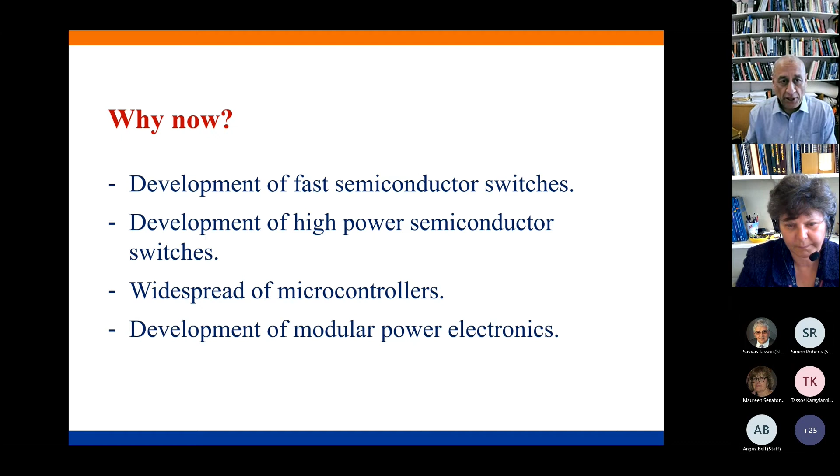Perhaps over the last few years there are what we call wide band gap semiconductors. They are available at very high voltage and can withstand very, very high temperatures. This is a major breakthrough within power electronics devices.

Another thing we have is the IGBT, insulated gate bipolar transistor. This is a big breakthrough. It has been around for more than 15 years. The voltage and current level we're talking about is up to 1200 amps and 4.5 kilovolts.

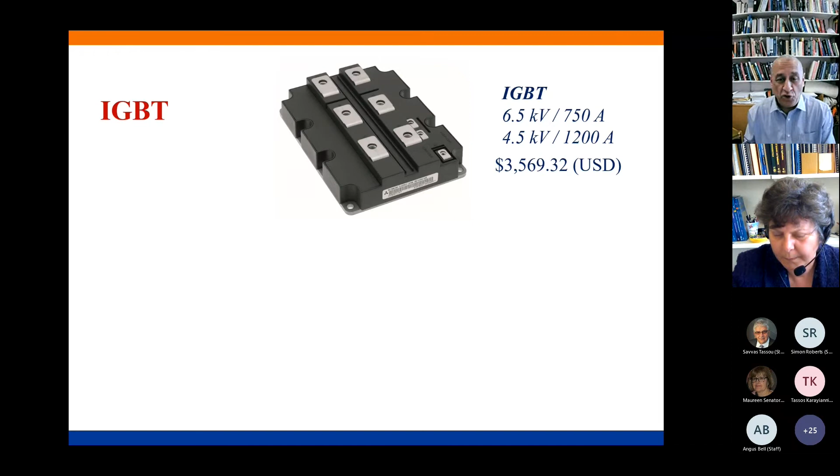Until 2 years ago the prices were very, very high. The price is still high, but suddenly over the last year, for those doing practical work in universities, a new IGBT came out on the market that can withstand 1200 volts and carry 75 amps—very high voltage, very high current—at a price of less than $5 compared to $3,500. So prices came down, especially for practical work, and a lot of my students are already using these sorts of IGBTs.

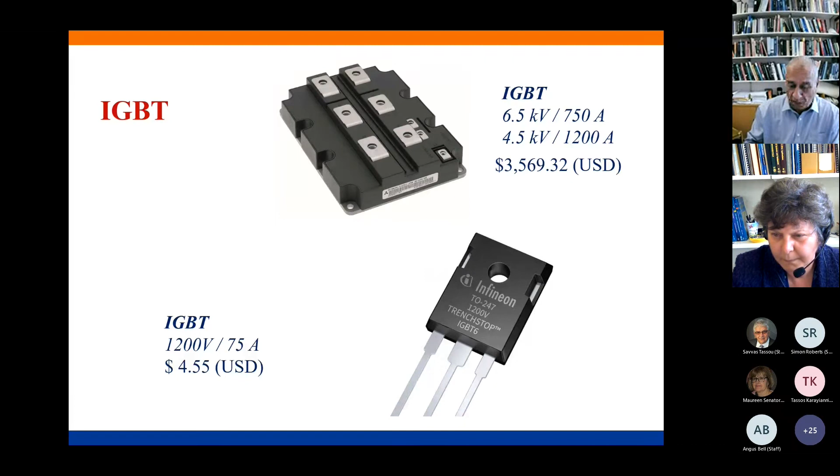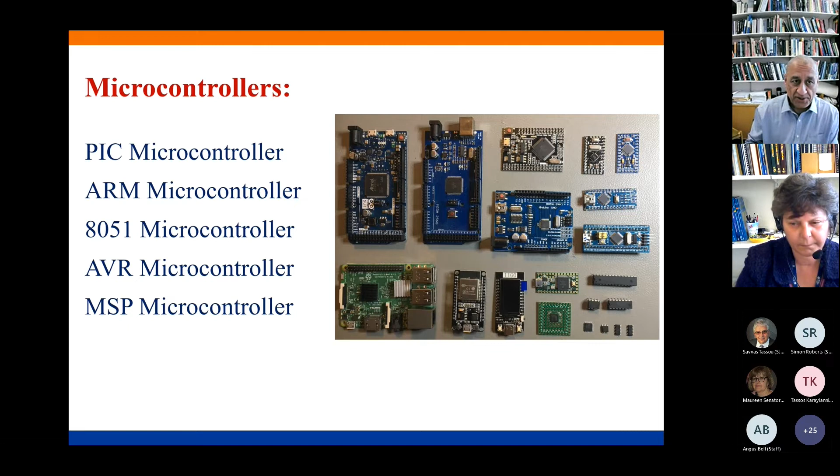For microcontrollers, there are so many varieties—the PIC, the ARM, the 8051—there are so many of them, and the prices became very, very cheap while they are very powerful and very fast. That enabled power electronics to do a lot of things which were very difficult to do in the past.

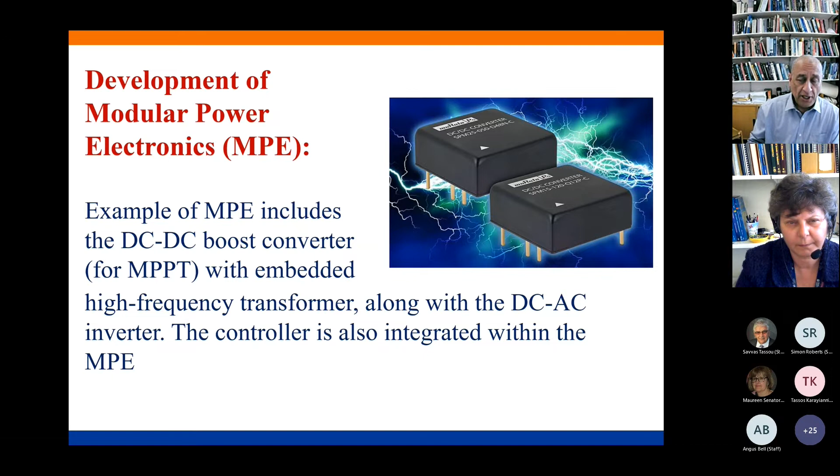I did mention modular power electronics. Nowadays you can find it all integrated in one—for example, maximum power point tracking within the inverter, within the DC to DC converter, all with the protection circuit, all encapsulated or integrated together in one part. So discrete components, although we still use them for students in the lab, from the manufacturing point of view, they are working within modular power electronic systems.

Okay, there are two challenges specific for power electronics. The first one is the inverter itself. Inverter, within electronic engineering, means conversion from DC to AC. Sometimes people with a mechanical engineering background call it a converter, which is from AC to another AC, while they have a DC link in between. Definitely the inverter is at the heart of any power electronic device nowadays.

Electromagnetic compatibility, filters, power quality - all of these are challenges within power electronics. Power electronics is sort of challenging itself: it creates problems and then tries to solve these sort of problems.

Within the inverter, when we talk about solar or renewable energy, there are so many different applications. For example, we can have a centralized inverter where all the PV panels are connected together via string diodes, and then we have a central inverter. Of course, this has some advantages and some limitations.

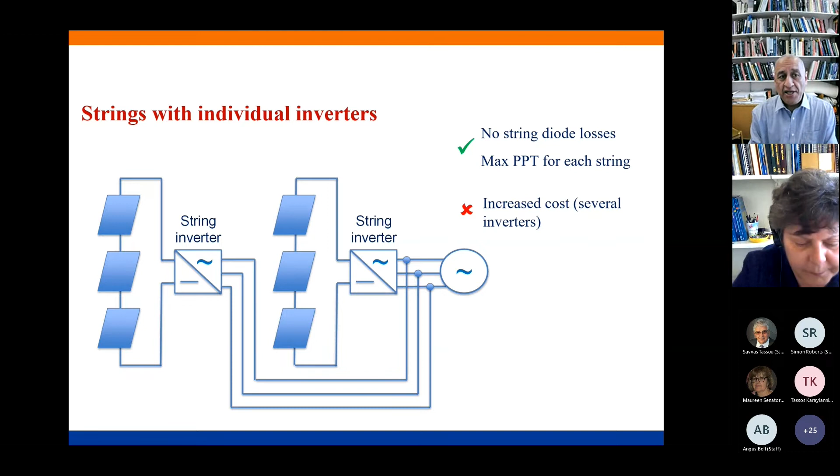We can also have what we call the string inverter, where the maximum power point tracking and the conversion from DC to AC is carried out per string. Again, this has some advantages and some limitations.

Then we have what we call the common inverter, where the maximum power point tracking is carried out per string, and then we have a common inverter connected to the utility. Again, this has some advantages and some limitations.

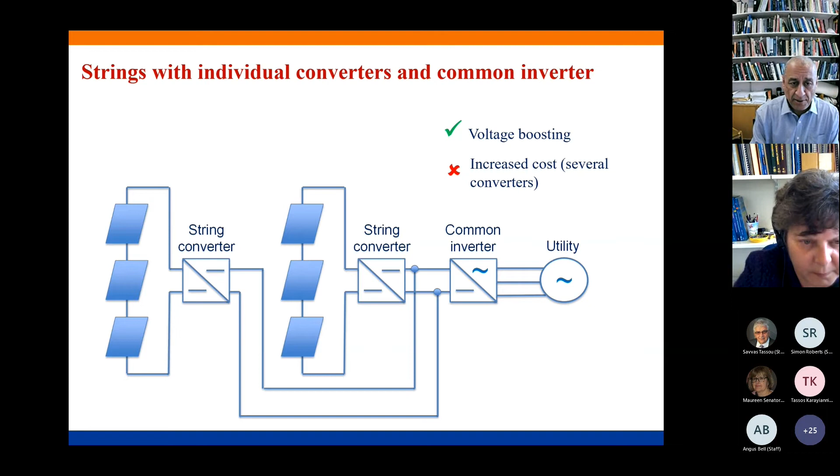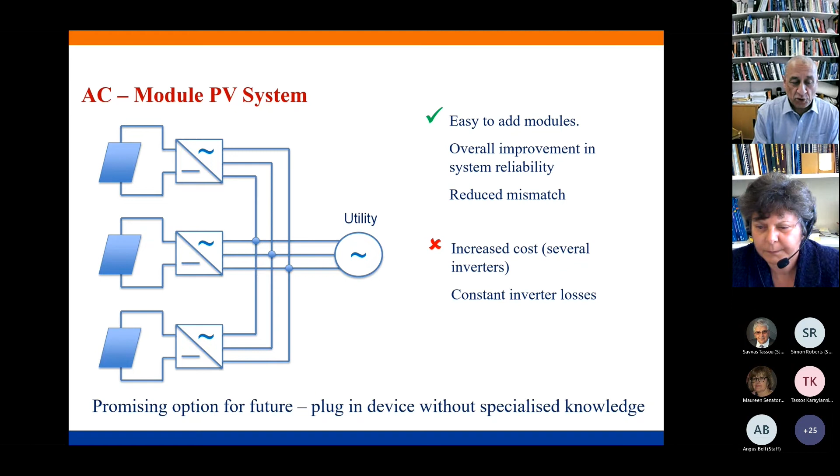And then, of course, we have the state of the art, which we call the AC module PV system, or microinverter. That means for each panel, the inverter is already built into the back of the panel, and they are all connected together and connected to the utility. This is very popular nowadays. However, the controller has to be challenging because proper synchronization has to be carried out. This is the promising option for the future.

These are key measures for inverter circuits, something like distortion - we call it total harmonic distortion - the losses, the complexity, the filter, the cost of the system, how it's controlled, and what sort of frequencies it's operating at. All of these are challenges when we deal with power electronics.

So inverter looks very simple, but year after year, I supervise a lot of students doing work on each of these bits of the inverter.

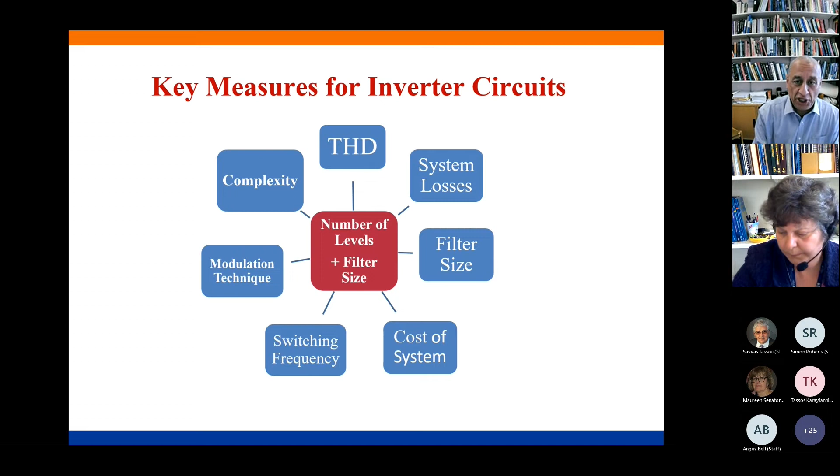Also, the second thing is electromagnetic compatibility, filters, and power quality. Power electronics in general generate a lot of problems like power quality issues, electromagnetic interference, and so on.

However, power electronics can also clean up the mess it generates. So what we have in front of us here is how we deal with identifying the problem, then identifying a range of solutions, then evaluating the solutions to find the optimum one. In a way, we create our mess, but we clean our mess as well. This is the challenge within power electronics.

An example of that is the active filter. When we talk about filters, something like nonlinear loads - let's say a computer is a nonlinear load - it generates a lot of unwanted frequencies, which we call harmonics. We use power electronics to clean up these harmonics using active filters. So what we do is inject harmonics opposite and equal to the ones generated from the nonlinear load, and that gives us only the fundamental component at the supply.

So this is one of the powerful active filter performances within power electronics. That's what I talked about regarding power electronics challenges. And then we have general challenges.

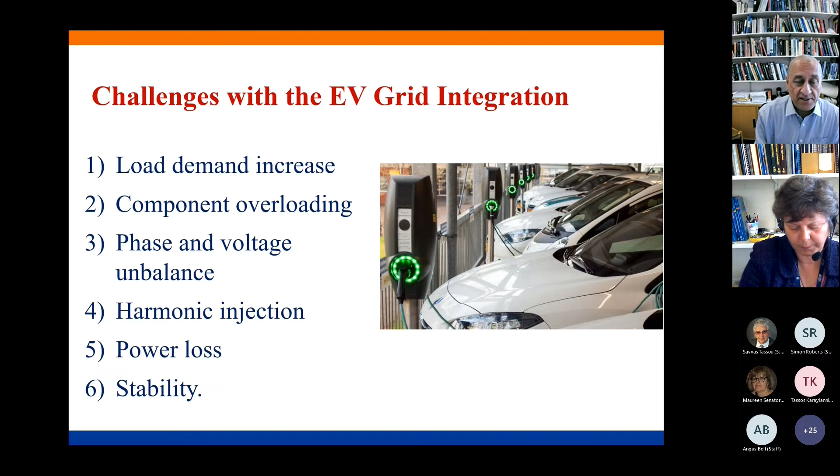First of all, a load demand increase. Suddenly we have a big load demand there. And then component overloading, phase and voltage imbalance, harmonic injection - all of these inject harmonics, power loss, stability issues. People working within the power system will understand each one of these is a big challenge they have to be aware of.

Now, of course, are we catching up? Can we do something? There are two scenarios you have to be aware of. The first scenario, car park within EV charging facilities - are we ready for something like that? And if we have home installed EV chargers, are we ready for that? So what I'm doing here, I'm taking these two scenarios - that's where we're going to charge our cars.

If I take the first one, EV charging facilities - here we go, you take your car, you go shopping and you charge it. Now, of course, we talk about the times of the shopping, it is limited within 5-6 hours. What do we need? If everyone is charging their cars, especially those who don't have a charger at home, now we're having a problem there.

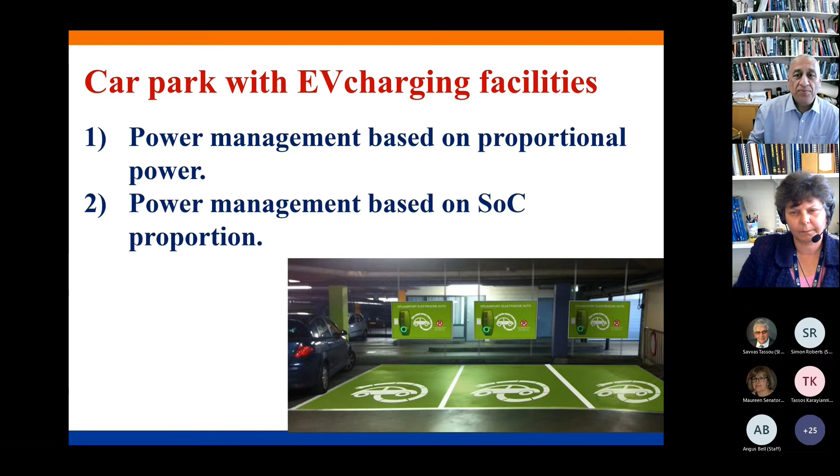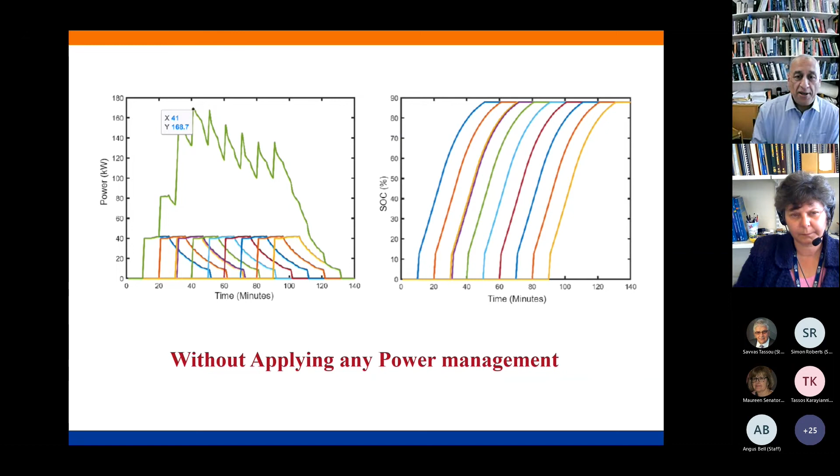So we must have a proper power management based on the proportional power there. Now, also we have to look at the state of charge of the proportion there. There is a study which shows if we don't apply any power management, we can see on the left hand cars arriving, charging, and the green one in the top is the power demand within the specific car park. On the right hand, I have the state of charge, which is the time per minute. Now, if I apply some sort of power management, I'm not charging the car as it comes along, but I am testing the state of charge of the car. Perhaps if a car has 20%, it might have more priority than the car which has, let's say, 60% or 70%. So some power management is needed there.

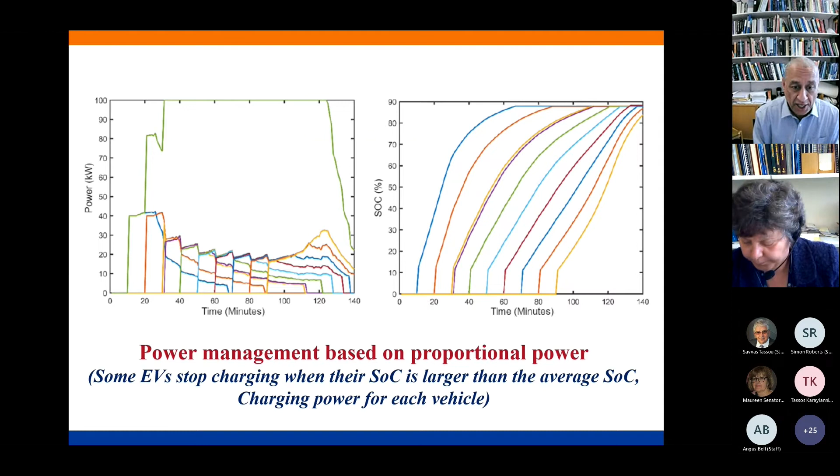And there's a lot of work already carried out within this area. So that will take us to the battery management storage system. We have to have the grid, and we have to have sort of the aggregator there, talking about the storage system, talking about the battery charging system - and they have to be in communication with each other in order to develop what is required there.

Okay, so this is the first scenario, which is charging your car when you go to the car park or something like that. The second one, home installed EV chargers. Now, this is an even worse scenario because there is a study showing that people, when they go home - this is probability over a typical weekday - people arrive at home around 5, 6, 6:30. And assuming people will plug their car into the electric charger to charge their cars, then we have a nightmare here.

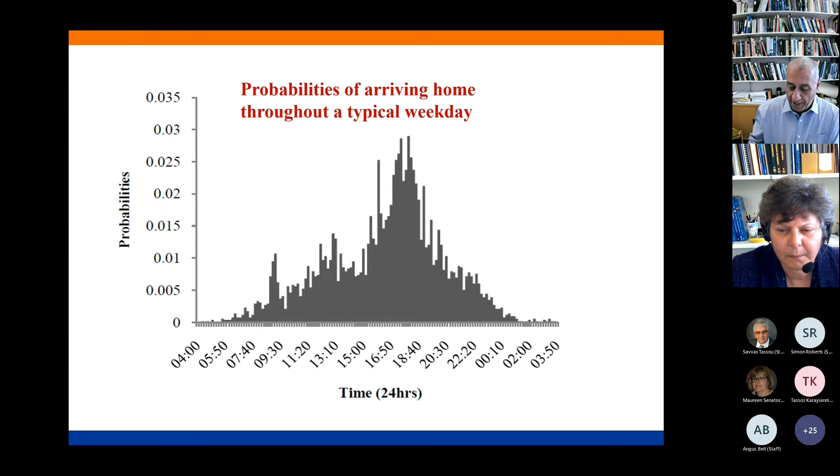We have seen Ahmed Zoba talking about the camel diagram in the morning, how the power demand is and so on. Here we go, we have a typical one of these scenarios there. Now, if I translate that into the power demand, we can see the red one is the normal one without any electric cars installed. This is a study carried out on 1,262 houses, and they found that during the time 6, 7, 9 o'clock in the evening, there is huge demand of power there.

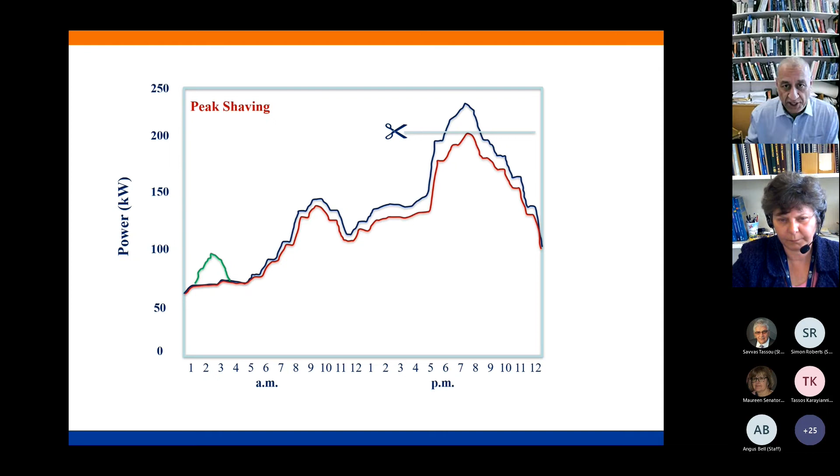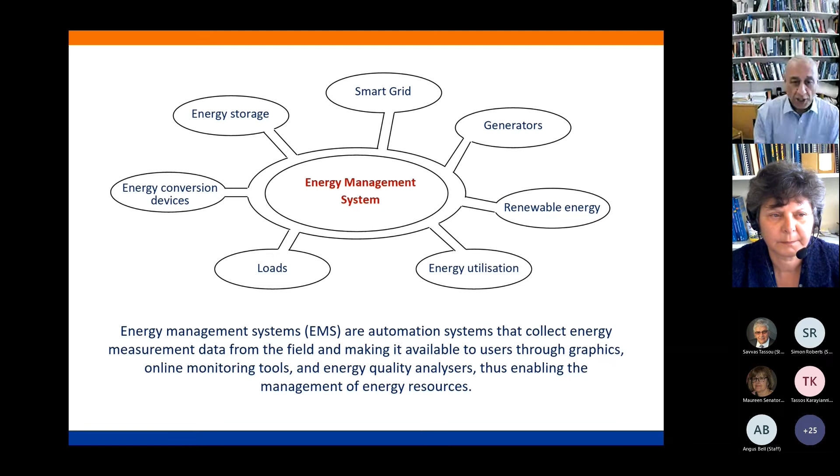Your 15 minutes is up. Continue, okay, but yes, we'll have less time for anything else. This is the last one or two slides.

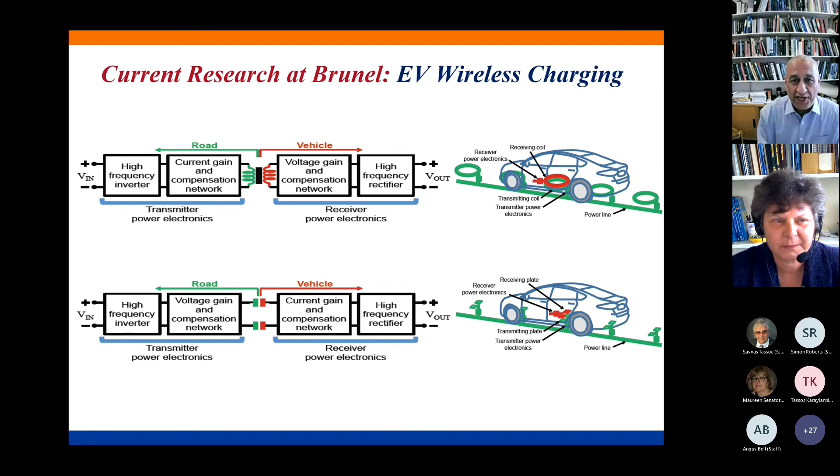This is some of the research I'm doing. I have two PhD students now working in this specific area, which is EV wireless charging, either capacitive or inductive wireless charging. And recently, as Sean mentioned this morning, we received a British Council project between Brunel and King Abdulaziz University in Saudi Arabia for enhancing research, networking, and education within this area.

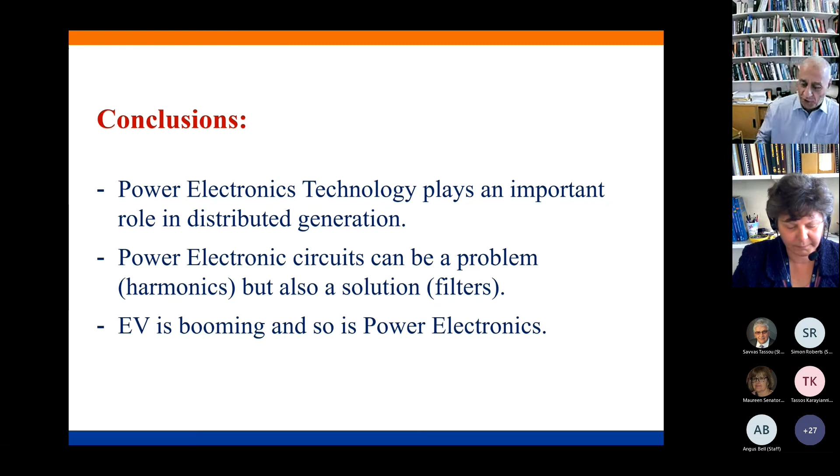In conclusion, power electronic technology is something very important and can generate problems, but can also solve them. EV is booming, and so is power electronics. Thank you very much, everyone.

Sorry for overrunning a bit on time. No, that's fine, thank you very much. It was a very nice presentation. I liked your definition of power electronics versus the more traditional definition, and quite a lot of the challenges that you outlined.

Are there any questions for Mohamed, please? Yes, Tang. Thank you, Maria, and thank you, Mohamed, for this excellent presentation, which shows your 30+ years of experience in this subject. My question is about the future of power electronics. We can see a lot of electric vehicles, PV systems, and even wind turbines connected to the grid using converters. There's also mention of DC microgrids. What is your vision about DC microgrids? Do you think they will somehow replace the current systems using predominantly AC? And what are the challenges in this subject?

Thank you very much. Actually, DC distribution is becoming more and more popular now, and we have so many DC distribution systems in China. Power electronics is at the heart of it. I was involved in a project with 1.6 megavolt DC voltage, so there's a huge voltage there. Power electronics, as I mentioned, is a very flexible area, so whenever there is work, either within energy, low electronics, or high power, it moves there. Thanks to the microcontroller, it gave us this flexibility, as well as the power semiconductor devices, as I mentioned.

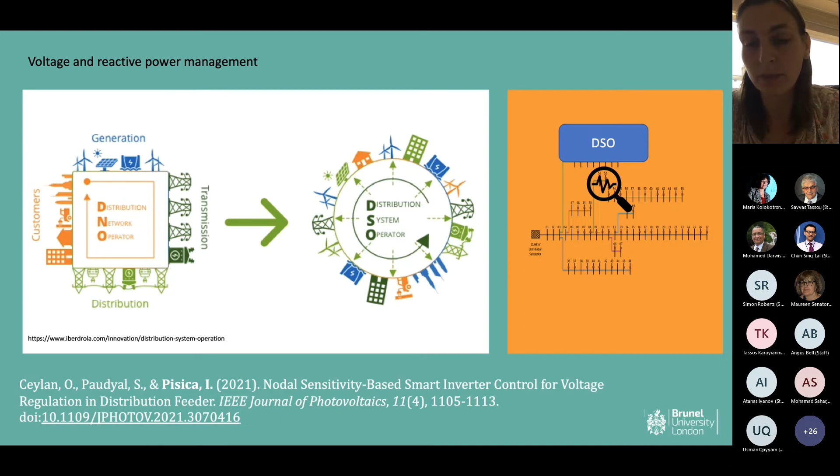You have here on this slide one paper relevant to this subject, published quite recently in the IEEE Journal of Photovoltaics with two collaborators. And of course, I will be presenting the current project, which focuses exactly on this problem.

Now, if we move on to the control systems, we are seeing that we need to control somehow the voltage, the reactive power, and the electric vehicle charging in the network. But in order to do so, we have to create the so-called self-healing network.

So what we are trying to achieve is to have electrical networks with embedded intelligence and embedded control that allows them to reconfigure automatically, so that those bottlenecks I mentioned earlier do not appear or are minimized in real time, and also by minimizing the losses in the network.

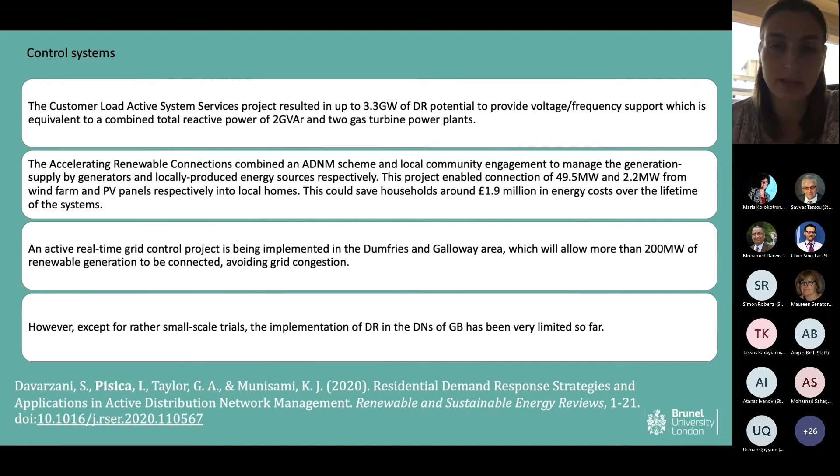When it comes to the subject of renewable energy sources, again, this is intertwined with everything else I discussed so far: reverse power flows and congestions, the voltage level, because they are introducing a voltage source in the network towards the end, towards the edge of the network. But one issue I haven't mentioned so far is the fact that our energy networks are three-phased.

And on each phase we have different consumers connected, while we are not able to know on which phase we are connecting. The distribution network operator also cannot see on which phase the extra input from renewable energy sources comes from. On top of this, you have the stochastic charging of electric vehicles, and that creates an issue in unbalancing our network, meaning we have different loads on the three phases, which creates several issues, and Mohamed will be more aware of the power quality aspects of this, but I'm not going to go into detail.

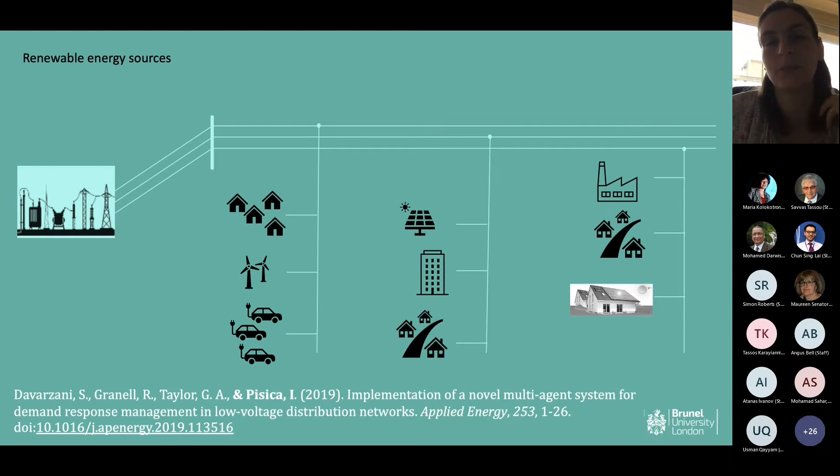I wanted to point out the fact that renewable energy is great, but for us, from the power system engineering perspective, they are a nightmare.

And of course, we wouldn't be able to discuss efficiency in distribution networks without touching on the digital part of the energy infrastructure. Here I want to requote something which says, you cannot manage what you cannot measure. I want to requote it as, you cannot manage what is unknown. The fact that we don't have visibility of the network at any given time means we don't know what we have to manage. By digitalization, we are trying to measure more of our system and understand more of what is happening in the system.

It's worth mentioning, because it's very topical now, that we still rely on gas to cover the very fast peaks of demand, and with the uncertainties in gas pricing, flexible power grids, these self-healing networks, may be a way forward. We also have to take into account the variability of both generation and consumption, since weather influences our generation, which makes things even more complicated. But if we have digital systems in the network, then we can manage our network based on what we know through digitalization.

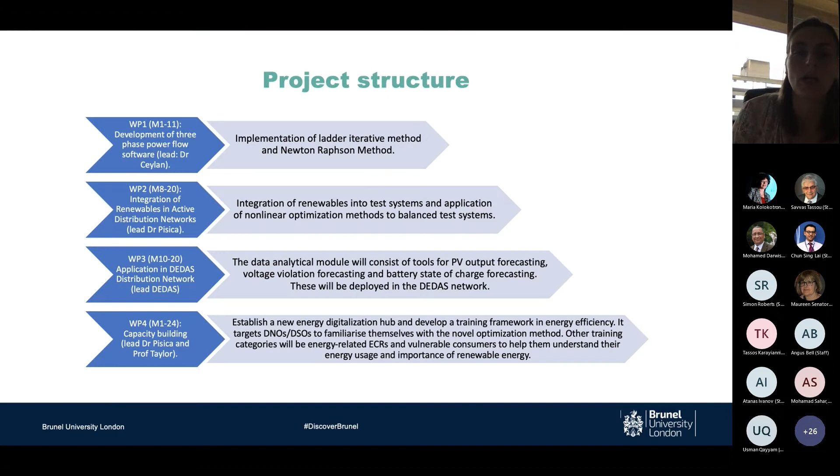This project tries to increase energy efficiency in a specific network in southeastern Turkey, because that distribution system operator is a project partner. This is the project team, which consists of a lot of early career researchers, one based in the UK and many based in Turkey. I'm not going to go into details of the project structure, but we have four work packages.

What I want to mention is that we have real life problems. The network of this distribution energy company we are working with supplies one of the poorest areas of Turkey, and there is a lot of energy theft there. We don't like to call it theft in power systems—we call it non-technical losses.

And we haven't found a way yet to model these losses in our models in order to take them into account. But DEDAŞ are working quite hard to get a model and a snapshot of their system that is accurate, in order to manage their assets.

What our postdoc did here at Brunel was to propose a new control system for PV panels in order to improve the voltage and reduce the losses in the networks. It's technical, so I'm not going to go into detail about the implementation, but of course these controllers have to have a way of communicating between each other.

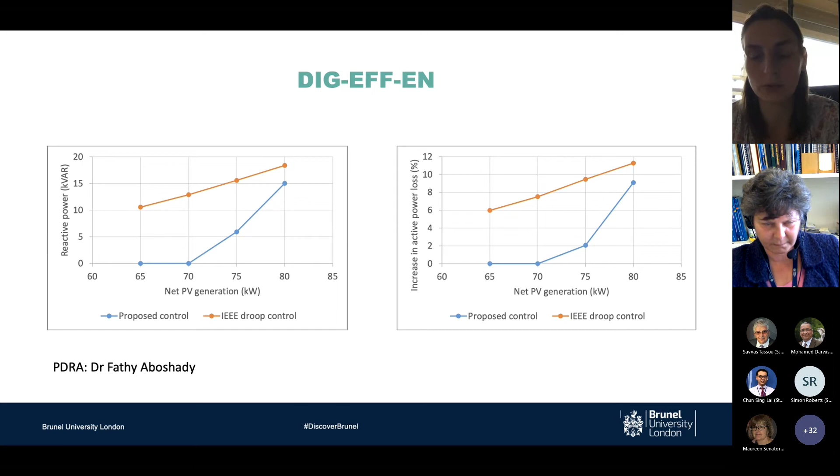With that, I'm going to conclude by advertising two PhD topics I am currently searching for students for—if you have anybody to recommend, please do. One is through the DTP and one is self-funding, linking to what Mohamed asked about in the morning, about using end-of-life EV storage for electricity networks. So, with that, I want to thank you for your attention, and apologies for taking maybe longer than allocated.

No, that's okay, thank you very much, Ioana. It was a very nice presentation, giving us the general picture and also describing one of your projects as well, and about the unpredictable behavior of the power generation you are experiencing. I thought I had problems in the buildings because of the unpredictable behavior of people, but now electricity is the same as well. Are there any questions, please?

Just a very brief question, Ioana. If you installed a charger in your home to charge your electric vehicle, if you have one, would the electricity authority or distribution authority know about it? No, not at the moment. Which is a big problem for us. Yeah, I thought so, because if they knew, perhaps they could manage the time of charging. Not now—at an idealized level, a lot of researchers are working on this and trying to control the charging of people, but it's only at modeling level because nobody knows what's happening in real life.

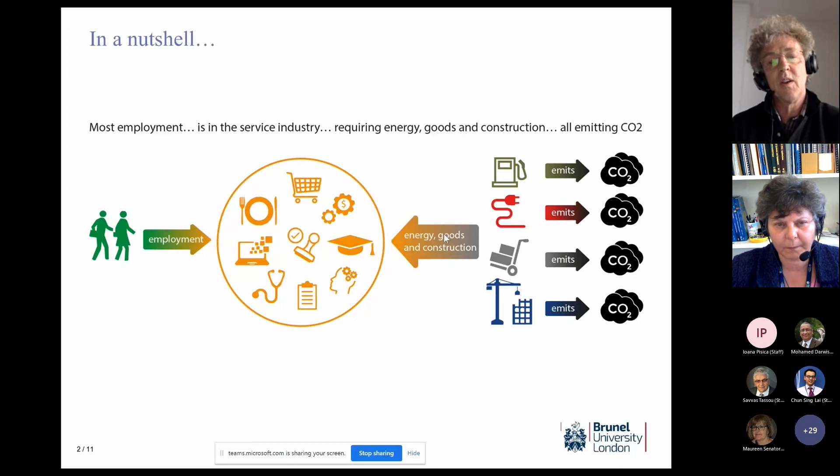Each of these emits CO2, as shown on the right-hand side, and this is what I'm going to use for the definition of the footprint - all those inputs necessary for each of those components of the service industry to operate, and furthermore, their major employers. What I'm not going to look at is the beneficiaries of the services.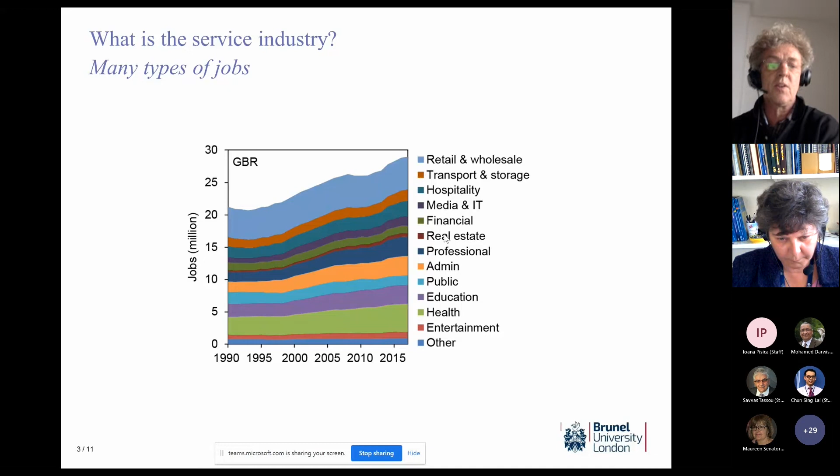At the end of the 90s, that really picked up in the number of people employed. Just remember that starting point in 1990 of 21 million.

We've got the same timescale here, but now we're doing a couple of things: first comparing to other countries, then to other industries, particularly manufacturing. The left-hand axis shows the number of curves coming out at 1, taken as unity. For the UK, the black curve, the unity in 1990 is that 21 million. Because that's an index, the black line on the right, which went up to 29 million, is basically a third higher. So on this representation, it's shown as 1.33.

By indexing from that point in time, we can make comparisons to other countries. The other countries here are comparable economies: Australia, Germany, Italy, and the States. What's remarkable is how similar the evolution of all our economies is in increasing the degree of service industry and employment. The only outlier is Australia, whose service industry, from a low base in 1990, is increasing a lot, but the other curves are remarkably close together.

Now to compare manufacturing. Again, we take the 21 million for the UK in 1990, and the black curve at the bottom is at about 0.21. That means in comparison to the 21 million in the service industry, only about a fifth of that involved in manufacturing. Taken as that reference of 21 million, it's been declining from about 21% to about 12%. So not only is it declining with respect to the 1990 reference, but the service industry itself has been getting bigger. If you were to reference more recently, the manufacturing ratio would be even less than 12%.

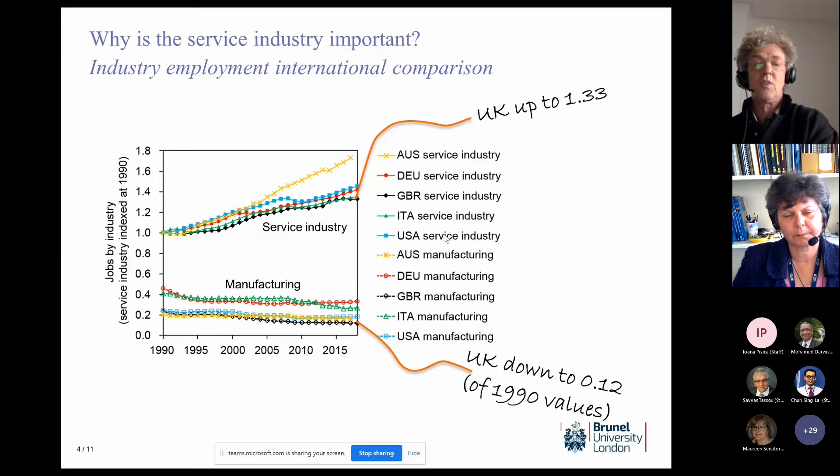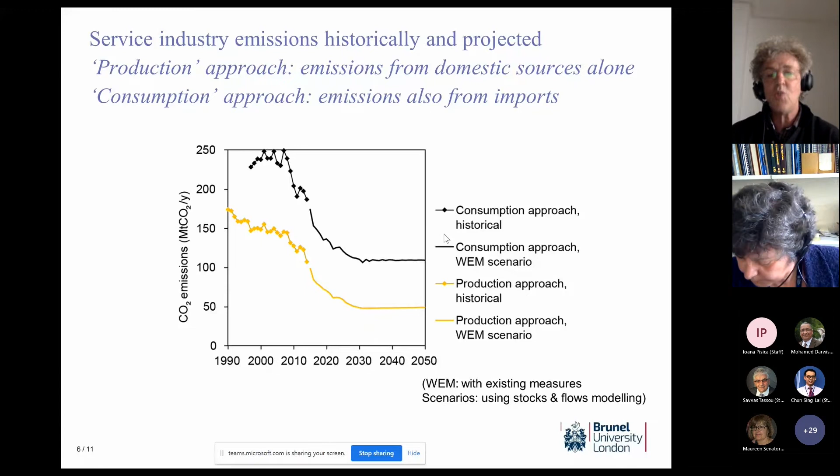This is really terribly important. Given the major employment aspect of the service industry, you can't just turn it off and lose all that employment - that's a no-go. That would substantially increase unemployment. And when we take into account the offshore, which is the goods brought in, that doubles it up. With existing measures, they flatten out. So these are huge problems where we're all trying to achieve net zero by 2050.

Let's break it down within our modeling. How do we consider all these components, which in the previous slide showed it all adding up? This now takes the consumption approach with imports, and we work through the colors. The top one is blue. On the right, you can see that's fuel, which basically relates to gas heating of buildings.

With existing measures, business as usual, it hasn't really reduced very much, as there isn't a really strong incentive to improve the thermal efficiency of buildings. The second one down is electricity, shown in red, and it dwindles to nothing by 2030. This means that once you've made renewable or zero fossil energy impact to electricity, substantial renewables and so on, then they're out of the equation. Clearly that's highly beneficial, but there's a lot of residual here.

The grey ones, dark greys for domestic goods - this is where we assign a footprint, and it goes back to Atanas's talk about manufacturing and its own contribution. This is where the service industry needs the goods for it to operate. There's a footprint not only from domestic, which flattens out, but there's a substantial one for imported goods.

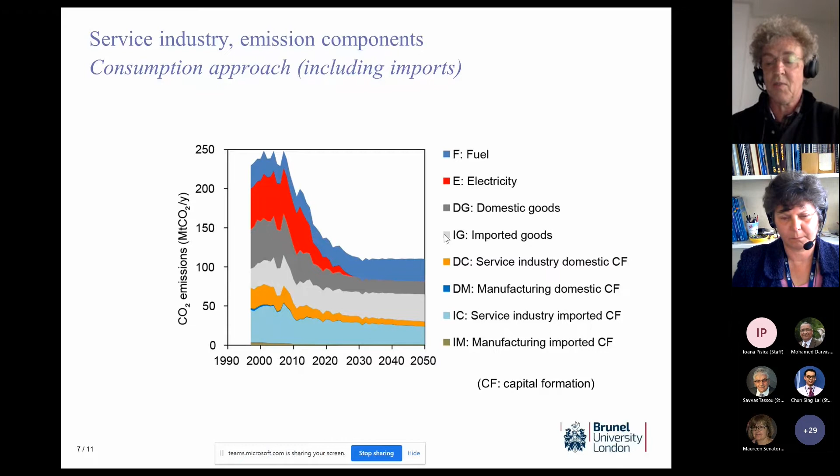Then finally, the bottom four colours, from orange down to the very bottom, on the right-hand side in the key it says CF, which stands for capital formation, where capital means buildings. So we have to look at construction and replacement of buildings, and these are very substantial - about a third of the emissions from 2030 on is from the buildings themselves. You can't simply talk about the running costs - there's no doubt the service industry is highly dependent on buildings. And I think I've noticed from the visuals that many people are in their offices.

And so we can take the number, which is the output of the service industry as value essentially, and the value of the goods needed per unit of output. Essentially, we're thinking the same concept as if we're looking at the power station and how much gas or other fuel is needed to get the output.

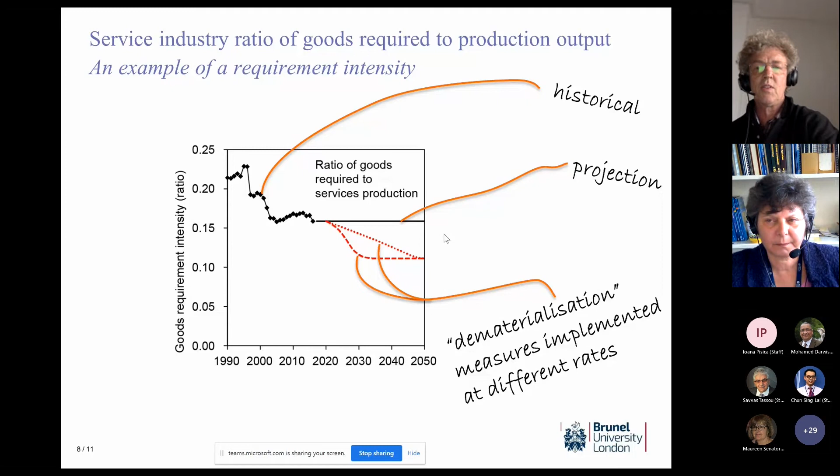In addition, what we've looked at is two rates of transition: a really rapid one, a logistic curve, the S-curve, or a slow one. So we've taken this approach, first of all, to look at all the transitions like the energy intensity of goods and so on, and then to look at what measures are in place to reduce the emissions or change their intensity, whatever. So here, this shows results of our analysis.

Again, for fairness, your time is coming up. I can see that you've got only 3 more slides, but yeah.

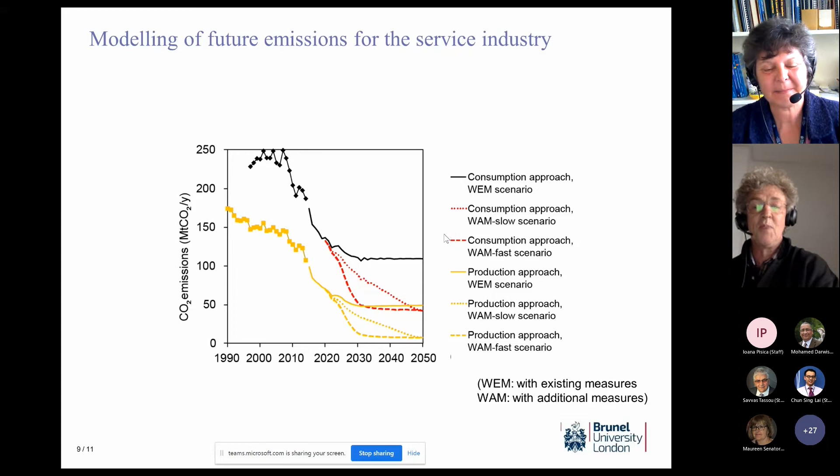Okay, so here it shows basically the curves don't go to zero with our work. And the summary then is that service industry drives GDP and employment. It's responsible for a lot of emissions. Here's an example of some of the inputs of goods: electronic, pharmaceutical materials, and machinery. They're increasing, with very few measures to date. And we think this is a major problem which will undermine the targets for net zero emissions by 2050.

And to finish with, here's some work with my colleagues and some recent papers if you want to follow this further. Thank you very much.

Oh, thank you very much. Sorry to rush you a little bit towards the end, but yeah. Are there any questions, please, for Simon?

Simon, I have a question about the recent decline in the service industry. You showed us in the graph that there was a sharp decline for domestic buildings and everything, and you explained it. But what happened to the service industry? You said it is about 20%, but then recently it's coming down a little bit.

Well, there are a number of measures taking place. So when you're talking about decline, you're talking about the emissions? Yes. Okay, so clearly one of those is electricity, and there's a strong move by many institutions, I'm sure at Brunel at least, to shift over to low carbon electricity. That's an easy one. There's another one of dematerialization.

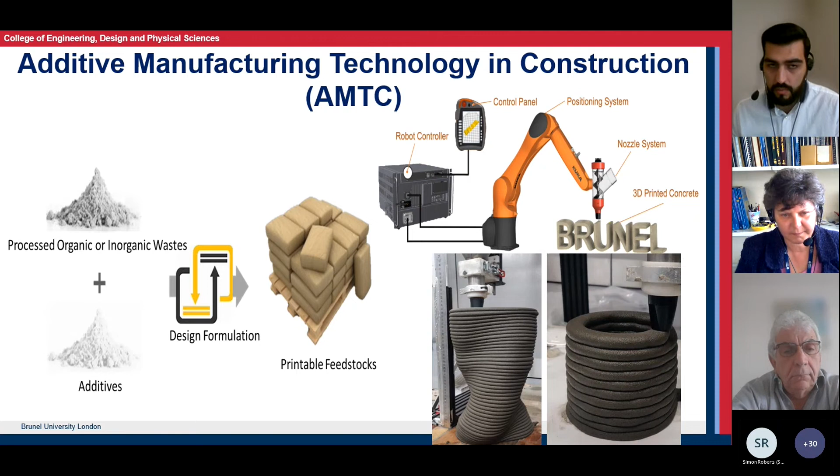I would like to start by emphasizing that my research is focused on delivering the 17 Sustainable Development Goals, in a hope to transform our world by 2030. Specifically, I am focused on goal number 11, sustainable cities and communities, and goal number 12, responsible consumption and production. My research group is called Additive Manufacturing Technology in Construction, and we combine different fields of science in a multidisciplinary approach to deliver innovation and transformation of the construction industry.

The focus is on material science and design formulations, meaning processed organic and inorganic waste plus additives, the smart materials that can change certain properties in concrete. The main science is the design formulation - it's similar to cooking. When you add different ingredients, you get an output. This is what we do with material science, optimizing performance, whether mechanical, physical, durability, and so on.

Hopefully by the end of this optimized design formulation, we will have a printable feedstock, similar to the cement bags we see on construction sites. But the difference is this is low carbon and also suitable for 3D printing applications.

That really fits well with some of the advantages of 3D printing. When it comes to concrete 3D printing, we have advantages such as reduction in material waste and labor, fully automated production, improved construction speed, and no need for molds or formwork - which means reduced environmental footprint and freedom of shape that architects have desired for so many years.

With traditional concrete casting, the molds or formworks have a certain shape, either rectangular or circular. After the concrete is cast and cured for 24 hours, the mold is no longer used, and that becomes waste. But with 3D printing technology, we don't need any molds, so we reduce waste generated in the construction industry, and allow freedom for futuristic geometries to be realized and printed.

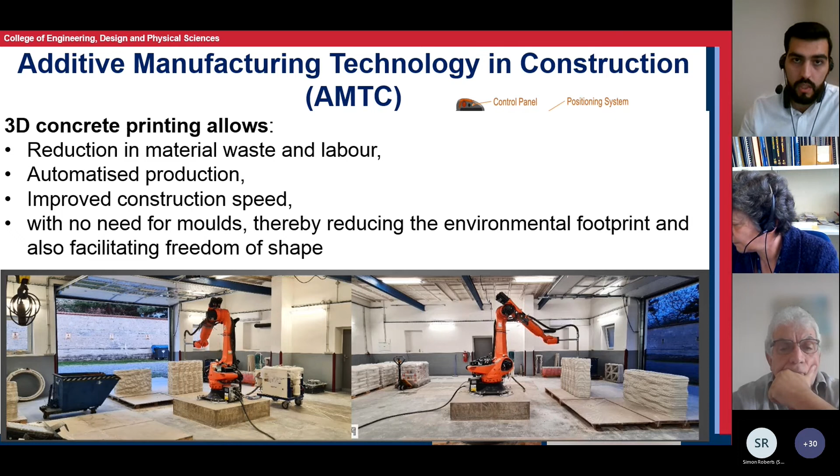So what is digital fabrication? For me it has three important elements that should work together in a gear format to drive the technology forward. One is the printer itself - either a robotic 3D printer or a simple robotic arm capable of doing any applications needed.

The environment that the robot is in is important, because the construction concrete material is quite sensitive and difficult to optimize and work with. The moisture and temperature can influence the end properties, so it's important where the printer is and how it's operated - the system size, robot speed and movement, nozzle geometry, mechanical adaptation. This is one element of digital fabrication.

The other element is the geometry - the filaments, overall shape, the 3D curvatures we can achieve with 3D printing technology, reinforcement, strength and stiffness. But the most important element - and I'm not just saying that because my background is material engineering - I think printable feedstock and printable material are the biggest element in the technology.

The composition of this material, using low environmental impact materials and alternatives to Portland cement, allows for a much more sustainable delivery of this technology. The composition is important - the mix design formulation, the aggregate size used to develop that concrete, improving compatibility, the admixtures used, and so on. This is the most important element when it comes to digital fabrication.

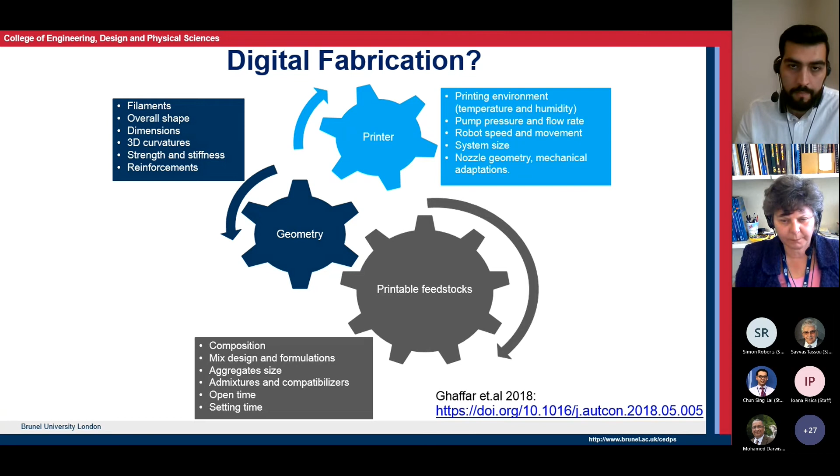You can read more about all this in the publication we had in 2018. The focus of my research group is on 3D printing of low carbon cementitious composites. We are using zero Portland cement, one of the main binders in concrete, and instead using a material called geopolymer or alkali activated materials. These are some of the prints we have done in Brunel Labs.

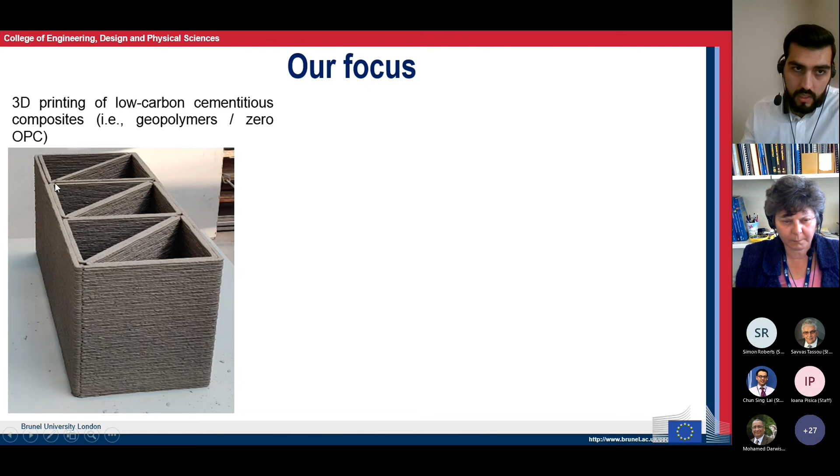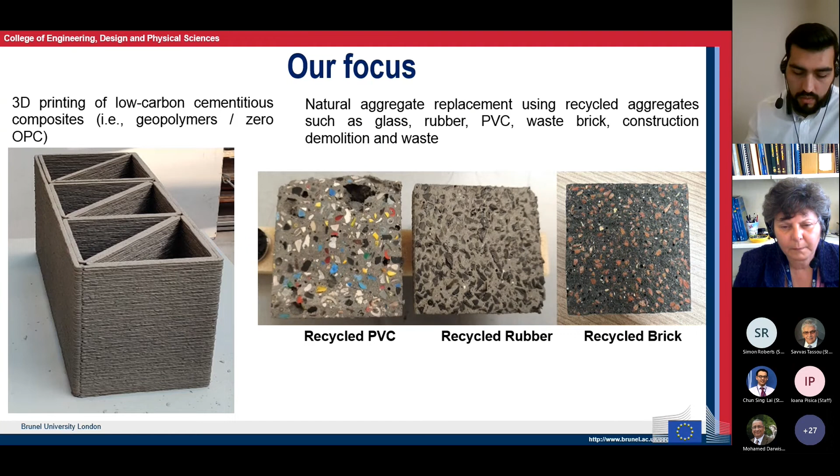The other focus of our research is on incorporation or replacement of natural aggregates with waste feedstock. We have picked three different streams: recycled PVC from industry cables, recycled rubber from the tire and automotive industry, and recycled brick from the construction industry. We have tried to replace natural sand or gravel in concrete with these wastes that would otherwise have gone to landfill.

I wanted to bring your attention to some facts around concrete and the construction industry. Concrete is the most used material in the construction sector, reaching approximately 30 billion tons annually. OPC, or ordinary Portland cement, the main binder we use to develop concrete, is responsible for 6 to 9% of global GHG emissions, equivalent to the aviation industry.

Modern society faces urgent environmental challenges. We've talked about CO2 emissions quite a lot. Waste landfilling is another important one, especially for the construction sector. And another important element very relevant to construction is the depletion of raw materials that we've been using for centuries to develop society and infrastructure.

The government has identified the construction industry as one of the key sectors where there is a need for change in order to reach circular economy and sustainable development. These are my motivations to deliver research where we can have a sustainable construction industry. The geopolymers we focus on, or alkali activated materials, are much more sustainable compared to OPC.

There have been plenty of studies conducting LCAs on these materials, and the environmental benefit is in a very wide range. Some research groups range them from 9% to 45%, and a more recent study has shown the capability of geopolymer to reduce GHGs by around 80%, which is quite encouraging. My group hasn't done any LCA work, so I can't really judge, but obviously with LCA, whatever you input, the output follows. So you really have to take these numbers and statistics with a pinch of salt and understand what has gone into the computation.

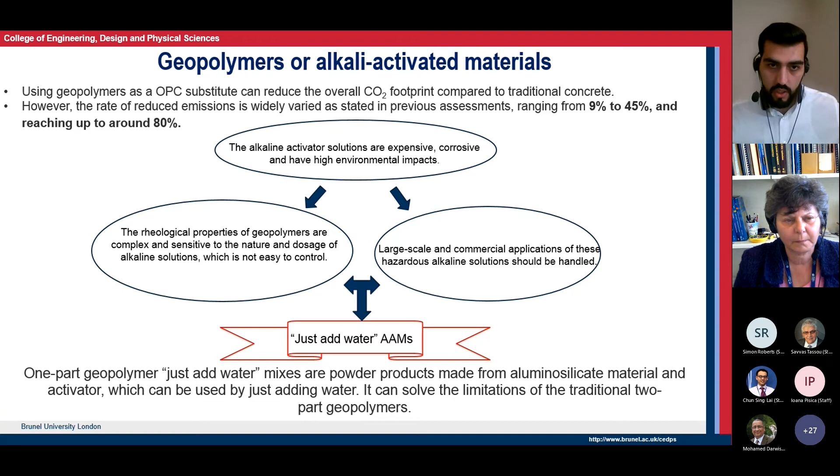We are focusing on byproducts coming from the coal burning industry and the steel manufacturing industry, namely fly ash and GGBS, or slag, as it's widely known.

The construction industry is lacking behind, decades behind our neighboring industries such as automotive and biomedical. We need to introduce automation and digital technologies to construction processes. The focus should be on valorizing construction and demolition waste, one of the huge challenges faced by the industry, and using material science to optimize performance and incorporate these wastes into construction materials and products.

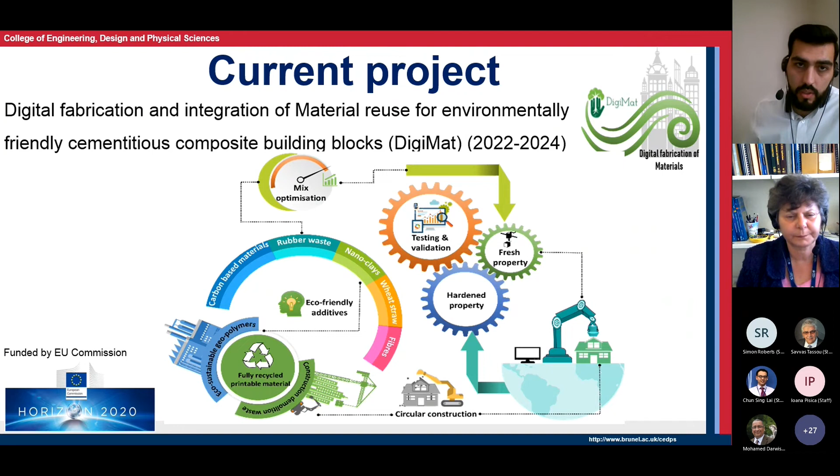One of the current projects, funded by Horizon 2020, which we postponed by 10 months so it began January 2022, is called Digital Fabrication and Integration of Material Reuse. We call it DigiMat for short, and this is our consortium. We have a few partners from Europe helping on this project.

Some preliminary results, and it's important to show you how we started. We started with a mortar gun, and this is the hopper system, where we put the materials, and we wanted to see if they were extrudable.

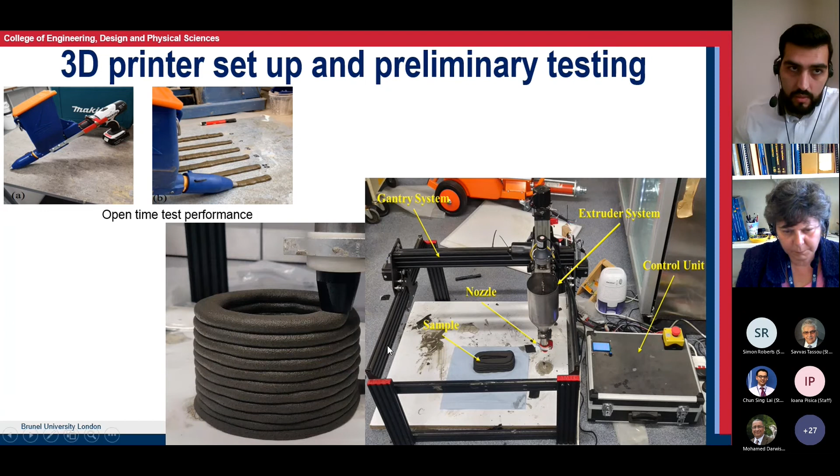Slowly, back in 2017, with small funding I got from the university, I purchased this gantry system 3D printer, and now we've updated and upgraded it. Last summer we did some upgrades so we can print larger sizes - it was 0.5 meter by 0.5 meter by 30 centimeters in the Z axis, but now that 30 centimeters is updated to 1 meter. That's how we started back in 2017, but now we can really print large structures.

Here's a video of one of our first initial prints using the Portland cement binder system, which is not very sustainable, but it's for benchmarking against our new materials, which are a lot more sustainable.

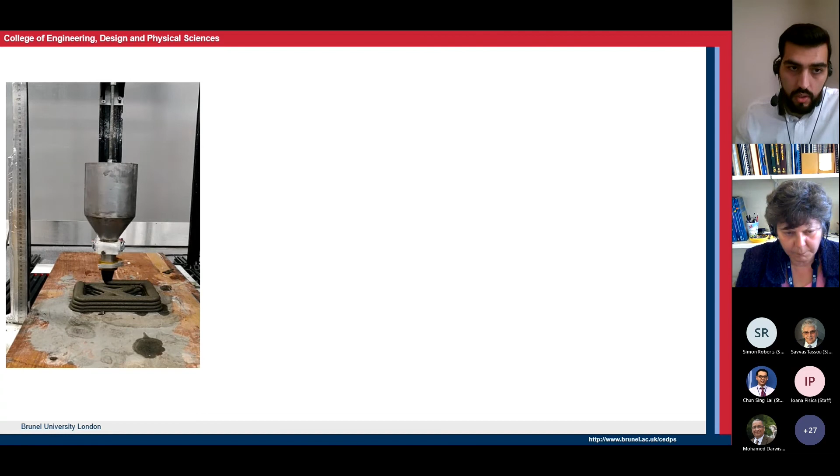And you can see the final prints and the complexity that we can have with concrete 3D printing, such as the twisted column here and so on.

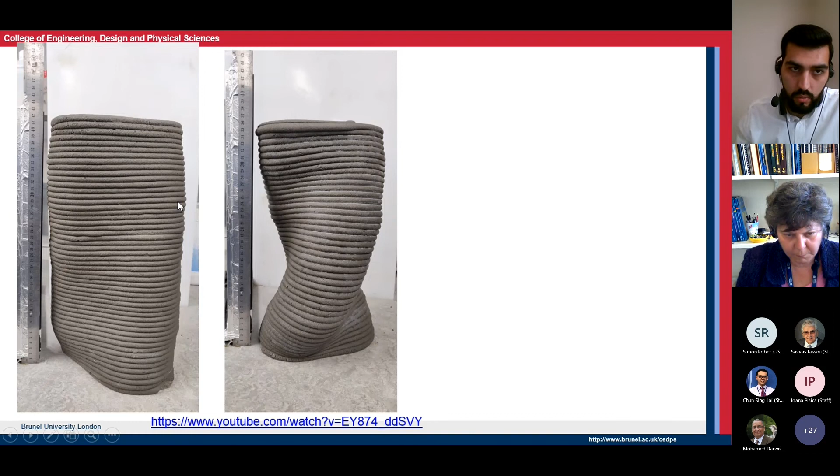But I want you to look at the resolution and the print layers and the print quality here. When we compare it to our new material in the next slide, you can see that we've achieved a lot more improved properties when it comes to shape stability, shape retention, and the whole resolution of the printing.

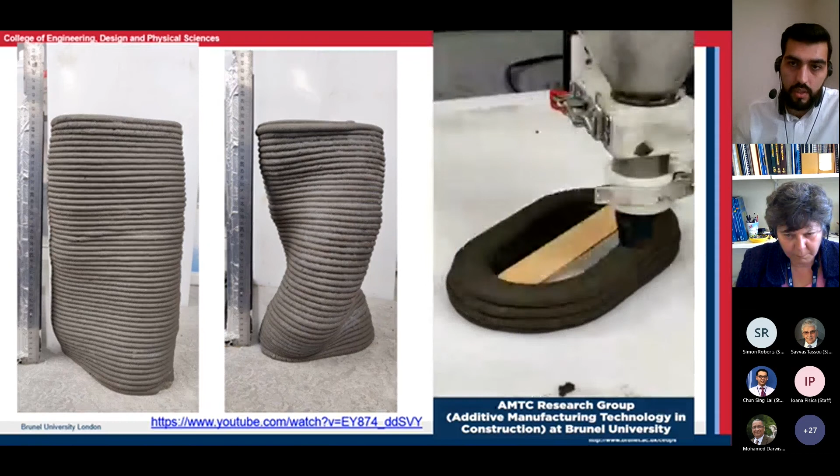And this is thanks to our geopolymers that we are using. Not only are they more sustainable compared to Portland cement, but they are more suitable for 3D printing application, and they actually result in much better results in terms of resolution and print quality.

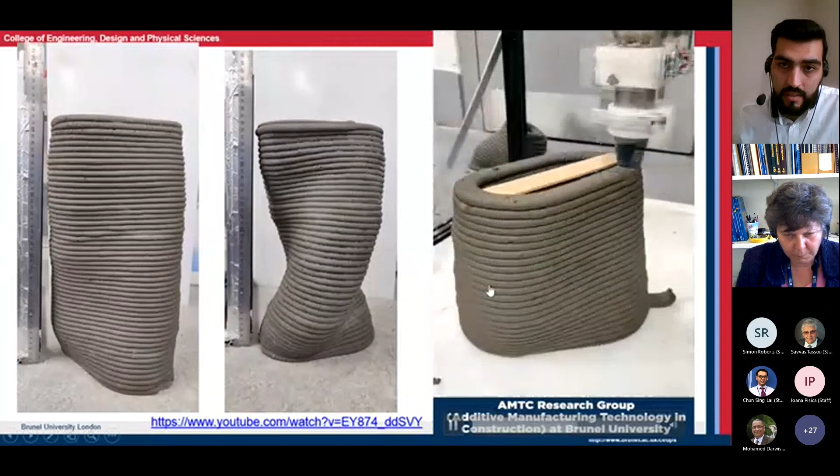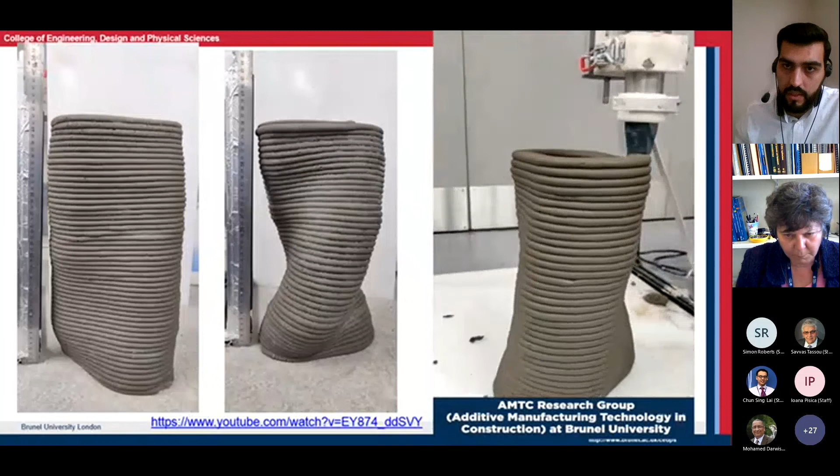And this is a video showing our geopolymer, which is using recycled sand and recycled waste brick. So the clay bricks that we have used here have been crushed into small sizes, and they replace the natural sand, which we are running out of, with these waste bricks.

We use these two important materials to help increase the flexural strength, the 3-point bending test: attapulgite and PVA fibers. We studied the fresh properties, so as concrete is mixed, immediately after mixing.

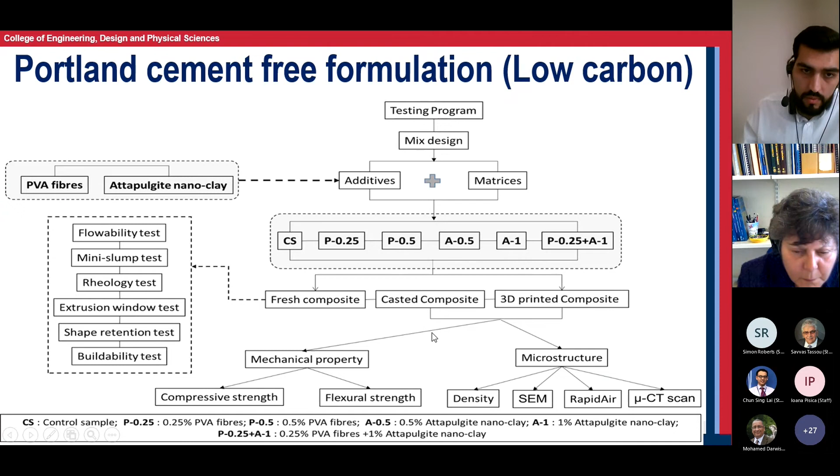We also did some casting of the composite in order to have a benchmark. And of course, we 3D printed the samples. We investigated the mechanical strength and the microstructure in order to draw some conclusions.

The mechanical results were very encouraging. We were able to get flexural strength of near 14 MPa after 7 days, which is quite high compared to Portland cement. Portland cement after 7 days, you can only get half of this.

And compressive strength, which is one of the most important parameters when you talk about building blocks, we were able to get as high as 70 MPa, which when you compare that to Portland cement, you can only get around 50 MPa, depending on the cement type and category that you're using.

But also you have to bear in mind that these binders have very minimum environmental impact compared to OPC.

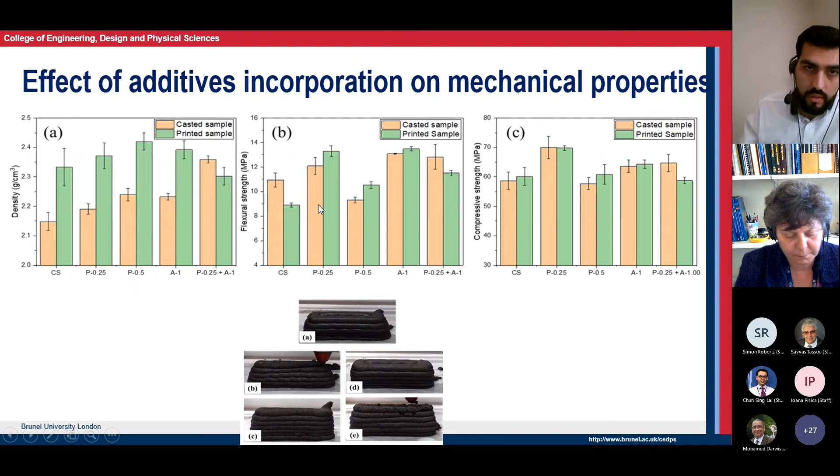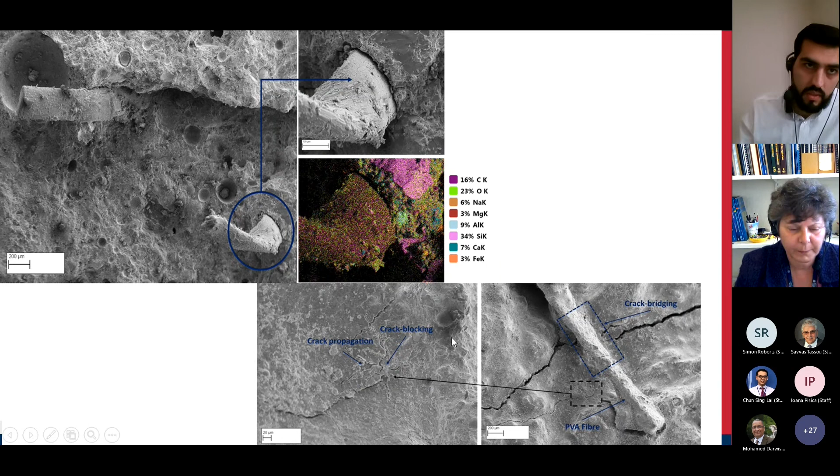We looked at the microstructure. The SEM images here are showing us the PVA fiber and the interface of the binder, low carbon binders and the fibers, and how the cracks have been arrested or blocked because of the presence of these fibers. So this is why the flexural strength is as high as it is, as I showed you in the previous slide.

So in the future, we want to continue to develop 3D printable construction materials for sustainable manufacturing, really and truly enable circularity in the built environment through material science, property engineering, and innovative technologies such as 3D printing. Waste valorization is an important element of my research, and we want to integrate as much as we can into construction materials and hopefully reduce the CO2 impact of concrete components by 70%.

So the key takeaway message for my presentation is that creative ideas are needed to reduce the waste stream from the construction sector, save the Earth's natural resources, and hopefully be able to deliver net zero construction, net zero carbon construction.

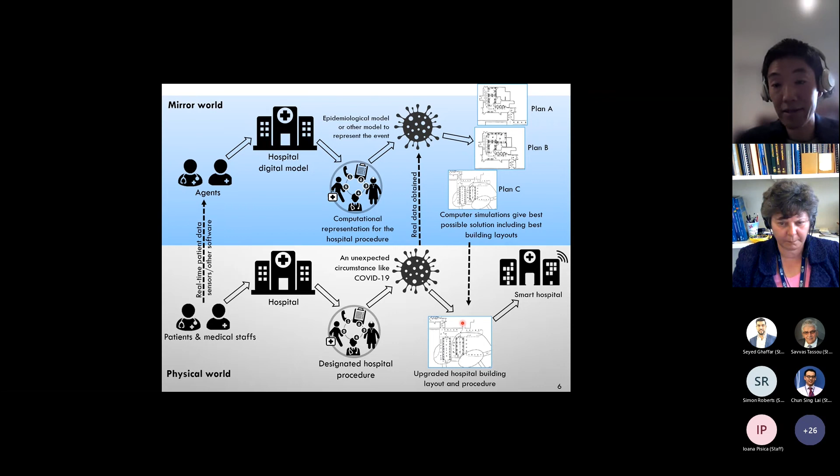This is achieved through agent-based modeling, which I'm going to talk about in the next slide. In this mirror world, or in these digital twins, we can make the judgment on which design layout is the best option to prevent certain future crises, and which will be reflected into our nowadays design. We can make this decision and affect our design nowadays.

This epidemiological analysis was based on the Wells-Riley infection model, which was embedded into the agent-based modeling simulations. So we can predict the risk of nosocomial infection of this transmissible disease of COVID-19, and even make the prediction for the R factors.

In this particular model, which just presents a small corner of this hospital, which we try to model with nearly 200 patients, the risk of nosocomial infection was about 8.2%.

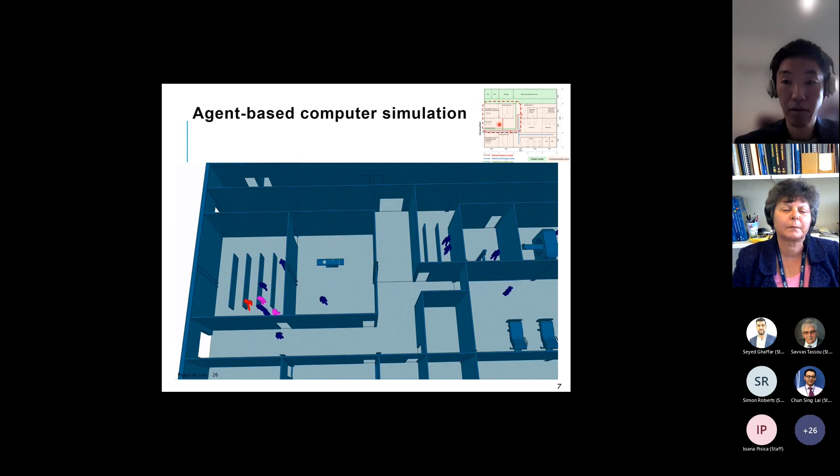This is the digital hospital I have created, and the previous slide just showed the visualized result in one of the corners. This digital hospital was created using building information modeling software, and later allows this agent-based modeling and infection model analysis to be conducted.

As you can see, this original building design adopts a two-way system for both the patients and the staff. I used a similar method to create other departments run by the hospital, including the A&E and UTCs.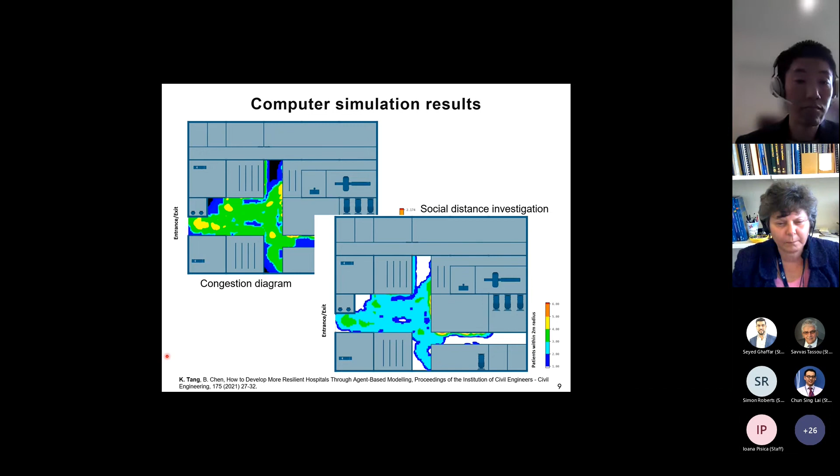In addition to this infection risk analysis, some other useful information can be obtained through these computer simulations, such as how congested this common area, this concourse, is going to be through agent-based modeling. We can also analyze how well this social distancing requirement can be satisfied. This modeling result shows, based on the 2-meter social distancing requirement, how well this can be met.

These results are discussed in the paper shown below, published last year. So I'm talking about how we can help as civil engineers. Previously I showed through this digital hospital what we can do. Next is how we civil engineers can help hospital developers better control infectious disease transmission.

This shows the development of a one-way system based on the existing building layout, but we can provide extra separation by changing the building layout using lightweight partitions. This gives separate pathways for both patients and medical staff to check in and check out.

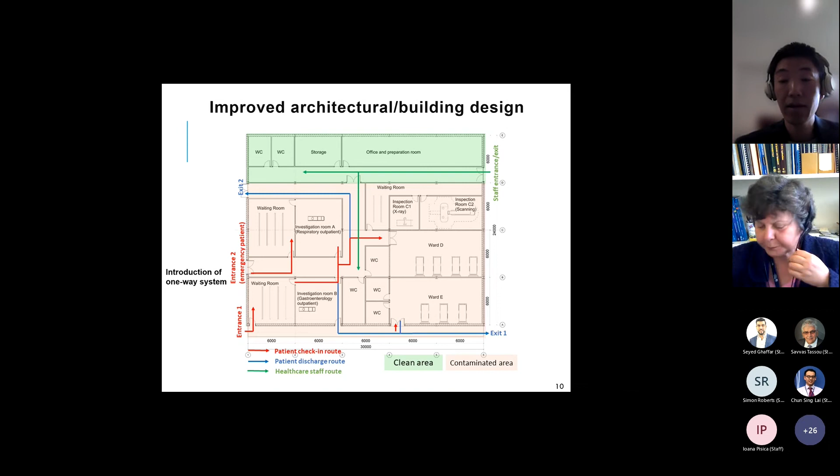I ran a similar model as the previous one, and this time we can bring down the infection rate — the previous one was 8.2%, and this one can reduce it down to 6.1%. Similarly, we can investigate how congested the corridor is going to be.

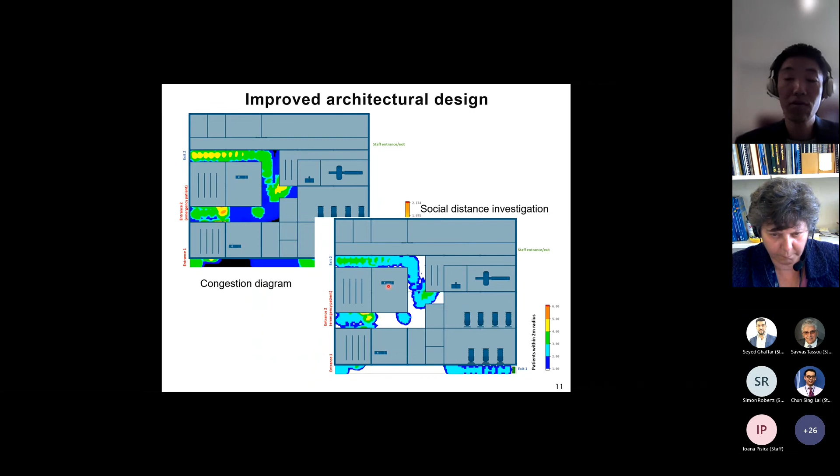We introduced another pathway to achieve this one-way system, so we now have two concourses in this building model. We can also see how well we can help meet social distancing requirements by reducing the total number of patients and staff per square meter, or per 2 square meters. This improved building layout helps maintain adequate social distancing for patients and staff.

This was one of the previous slides where I showed this digital twin concept. We can justify the resilience of a building design based on its ability to prevent nosocomial infection, because this digital twin is in particular meant to prevent and control nosocomial infection. This is our major purpose for this project for the time being.

In addition, we can build this hospital to be more versatile, with the ability to change the layout without costing too much. This can be achieved through modern methods of construction, or MMC, or as my colleague Seyed mentioned, through 3D printing, we can bring down the cost. So we can achieve a more versatile building layout without costing too much.

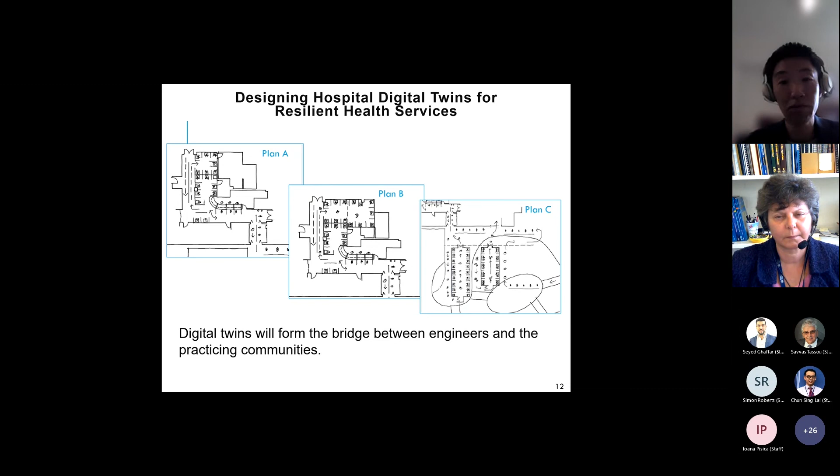This is the last slide. This is an ongoing project, collaborating with our computer science department, a UK major healthcare developer, and local hospitals. Thank you very much.

Thank you. Thank you, Tang. Very, very nice. And as I said in the beginning, very topical presentation for hospitals, but I suppose it can apply to other buildings as well as you extend the method. I think we have a question from Angus.

Yeah, thanks very much, Maria. Lovely talk. Excuse my ignorance of this question, but what is the difference between a digital twin and a computer model, or what would have been called a computer model in the past? What do digital twins do that what we would have called computer models don't?

Well, I think it was called a computer model, a digital model, in the past. A digital twin, my understanding is, you can put different layers on top of it — for example, we can use this digital twin for one project to calculate CO2 and energy efficiency. And for this we can put a different layer, considering different priorities, such as for a hospital to control infections. So to be honest, I think the bottom line is there isn't too much difference.

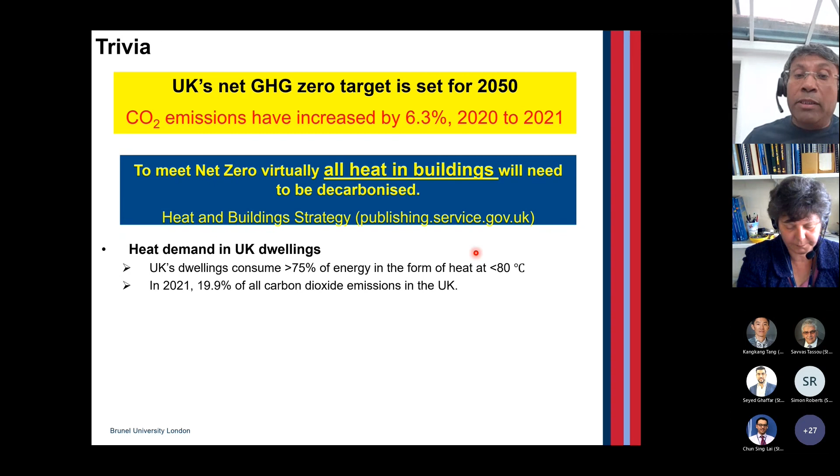We also have to remember that this heat is not only simple heat, but it also accounts for 20% of the carbon dioxide emissions from the UK. So the target is big.

So what we're going to do about it is, we've gone about a common sensible approach, whereby we're applying energy efficiency measures, using things like improved building fabric, windows, etc., which when applied on a high energy demand building can convert them into a low energy demand building.

The residual demand of energy in this case could be easily met, hopefully, by supply side technological interventions, which are solar, biomass, etc., or even new technologies like heat pumps, which in concept form convert the building into zero or energy positive buildings.

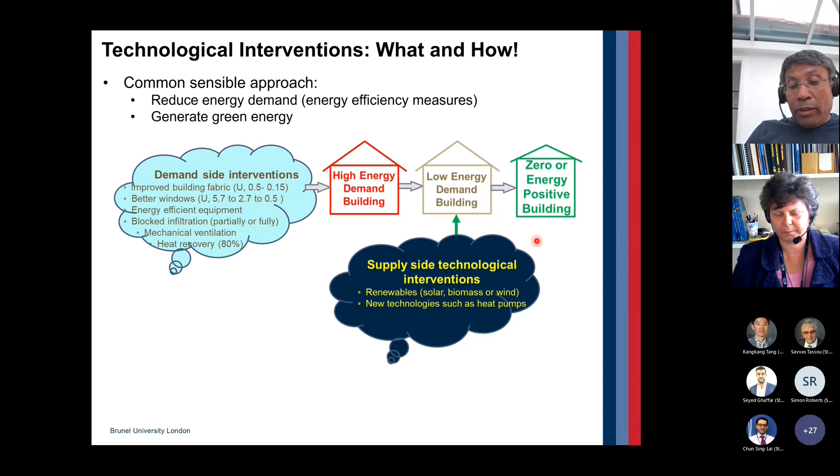But that's all good and well, but there are challenges. The challenges are: which insulation to use, for example, or what kind of solar technologies to use if we are generating energy in this case.

So my research focuses on developing something called vacuum insulation panels to provide a solution for insulation for buildings as well as other applications within the built environment. We've also looked into developing concentrating photovoltaics and thermal panels within solar energy.

To give an idea of why vacuum insulation panel, or insulation in general, is important: at the end of 2021 in Great Britain, 30% of dwellings with cavity wall insulation had no insulation in their cavities, 34% of lofts were uninsulated, and 91% of buildings with solid walls had no insulation at all.

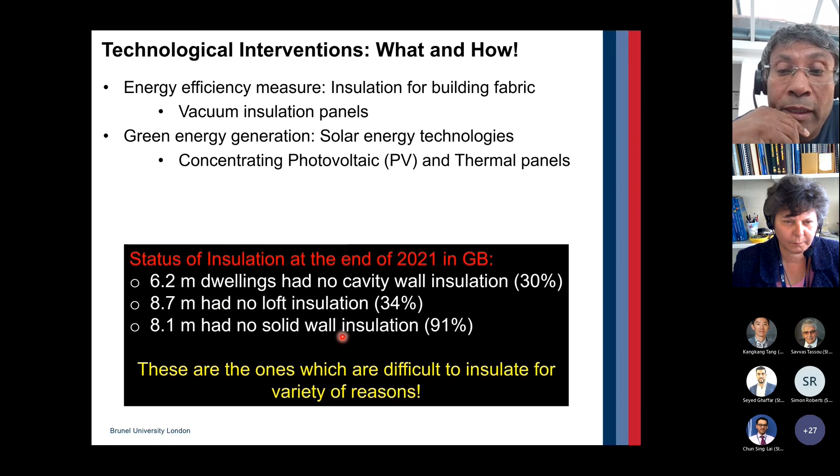Clearly, there is a huge amount of insulation needed to make these dwellings decarbonized, as the government has set the target for. But in my view, these are the ones which have been left out because they are difficult to insulate, for a variety of economic and technological reasons.

That's where I believe the first research I want to talk about today steps in, which is vacuum insulation panels. For the unchristened, these are a two-part insulation, whereby you have the inner core, which is a porous material, and which is vacuumized.

As a result of the vacuum, you can achieve a low level of thermal conductivity. But the challenge then becomes how to maintain this vacuum in the context of buildings for 100 years. Of course, there are other challenges within it, which are listed in our publications shown here.

But the benefit, if you can maintain the vacuum and the structure of the VIPs over 100 years, let's say, is this: the thermal conductivity of these systems is as low as 2 milliwatts per meter Kelvin, which is 20 times lower than any existing insulation.

One of the insulations that we've developed in our own lab is shown here, which is a rectangular insulation, 150 millimeter by 150 millimeter. But of course, it can be produced in larger quantities and larger sizes as well.

Because of this low thermal conductivity, the benefit is that you can use very thin layers of it to produce the same U value that would be produced by larger insulation thickness layers. An example is shown here.

For example, if you want to convert a 0.53 watt per meter square Kelvin U value, a typical UK dwelling wall, to a low U value, let's say 0.15, then a VIP of about 35 millimeters thickness will be sufficient compared to about 100 millimeters of phenolic foam and about 175 millimeters of glass fiber required. So there is a benefit.

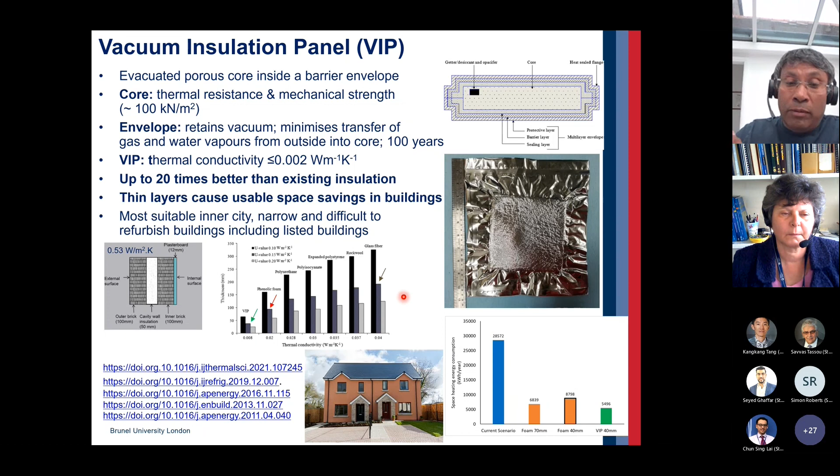But of course, it's not all that easy, because developing vacuum insulation panels, as well as predicting their long-term performance, is a very complex phenomenon. We've been involved in this for a few years, and we developed our own computer models, as well as a very extensive lab at Brunel. We're progressing towards it.

Through this research, we've shown that VIPs could not only be used to improve the building fabric, but could also be used within the built environment for other applications, such as refrigerators, ovens, dishwashers, washing machines, and even cold storage.

The reason for that is we're selling a huge amount of refrigerators and freezers around the world every year. For example, within only the European Union and North America, there are 17 million fridges and 2.5 million freezers sold every year, responsible for a huge amount of emissions depending on which power source they use. We've shown through our research that 60% of the cooling load is transmitted through the walls, which can be saved. If insulated by VIPs, this could save CO2 emissions by reducing the energy demand by greater than 50%, and at the same time, by introducing more thermally resistant insulation in the form of VIPs, we could save space within the refrigerated compartments, making the freezers more attractive to customers.

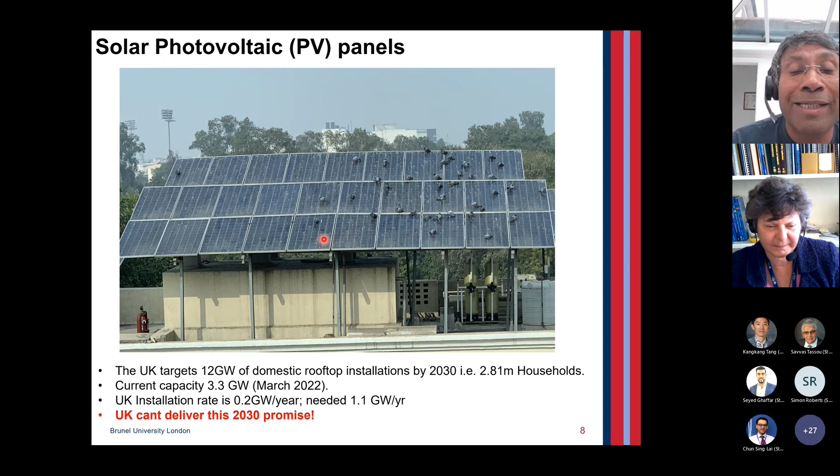So what could be done about this? What I think is that the reasons why we're not meeting this, or why the growth is slow, are as follows: number one, there is less incentive for people to go to photovoltaics because there is very easy availability of grid electricity.

Secondly, a very practical reason is this: there is a limited amount of roof space available in houses in the UK. For example, for a 4 kilowatt system, you require about 11 meters square of south-facing, unshaded roof space. Not many houses will have it.

Finally, you have the capacity of the panels, which cannot produce power when exposed to diffuse radiation, and are limited in their capacity to produce simultaneously heat and power or cooling. So that means there is no additional advantage or value added to them.

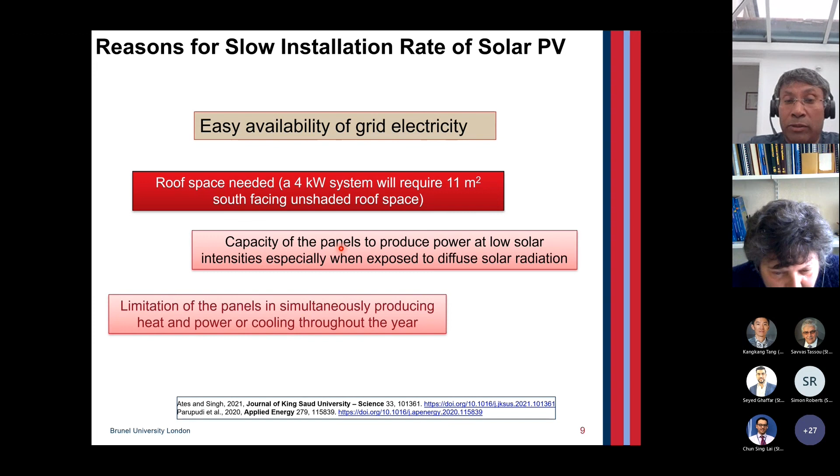Towards this, what we have done is develop systems which we call low concentrating photovoltaic systems and photovoltaic thermal systems, one example of which we recently developed on the ReCO2ST project. It's a European Union funded project.

On this project, we developed three types of concentrators: compound parabolic, V-Trough, and asymmetric compound parabolic concentrators, and showed their performance in conjunction with conventional silicon cells for producing power up to 40% more than a flat PV panel in London.

The installations were done in London, in Brunel. You're welcome to see it in the Clifton building in the student halls, as well as in Vevey in Switzerland. The idea was that here not only do we show more power produced, but we wanted to demonstrate the multifunctionality.

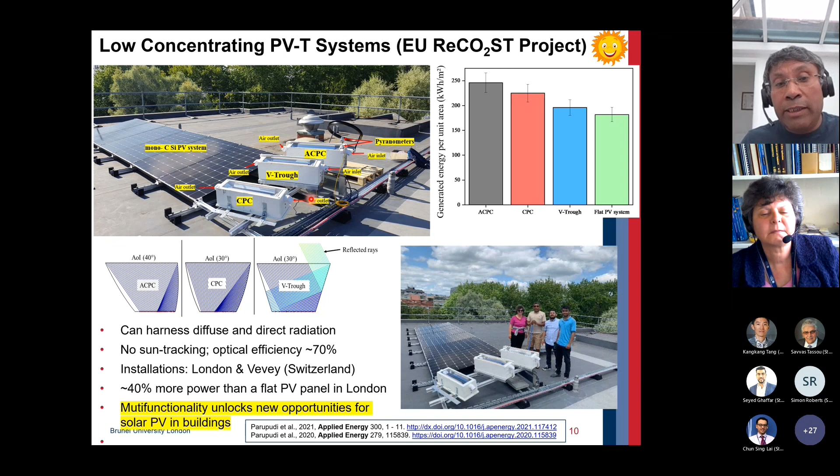We measured the performance over 16 months minimum, and we've done publications. Very important publications have come out - two of them are listed here, though several have come from this work. There are more to come as we're analyzing the data.

On the solar thermal concentrator side, normal concentrators which produce high temperatures look like this, but these are very big and cannot be installed on roofs. So the challenge is to develop systems which are able to make use of diffuse radiation.

Diffuse radiation is characteristic of radiation in the UK - up to 55% or more of daytime radiation in the UK is diffuse. So we wanted to achieve higher optical efficiency without any sun tracking, and also be able to deliver higher temperatures up to, say, 200 degrees or even higher.

Our system has been enabled to achieve this by developing what we call a directly absorbing nanofluid, which absorbs solar radiation directly, from the very short wave radiation to the very long wave radiation, and then transfers heat to the end user demand center.

We've developed these systems on various projects listed here, and demonstrated their use for electricity generation through ORC, organic Rankine cycles, in Egypt, for cooling and running a cold storage in Kenya, and for running a biogas reactor for thermophilic reactions in India.

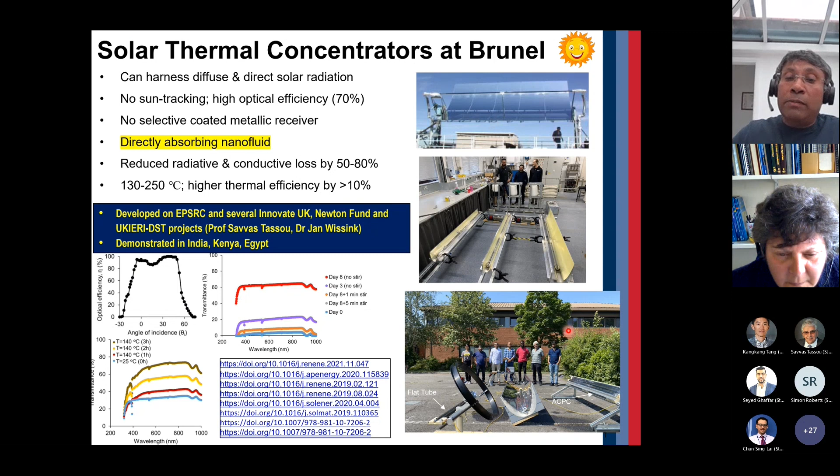Several publications have come up as well, and my team has tested them here as well as across the world.

In summary - I'm not sure how I'm doing. That was my alarm, so you're in good time. All right, okay, okay, thank you very much.

So these are new technologies which we just talked about. There's not much experience of them in buildings in real life, but there are challenges we know them, and we're progressing towards resolving them. We have a good track record of attracting funds, and hopefully we'll continue to do that. And we're happy to collaborate with colleagues. Thank you very much for your attention.

Thank you very much, Harjit. Thank you for outlining two technologies that could help in reducing energy consumption in buildings, for insulation or for generation of electricity. Very nice, very nice. Thank you. Any questions, please?

Still too late, I suppose, in the day - people are getting a little bit tired as well. But Savvas, can I ask one question before I let Savvas ask his question? You talked in the beginning, before you started talking about the technologies, about decarbonization of buildings, which means electrification for heating and cooling. And... no, it doesn't? No, okay. I'm not a big supporter of electrification, to be honest, if I have preempted your question.